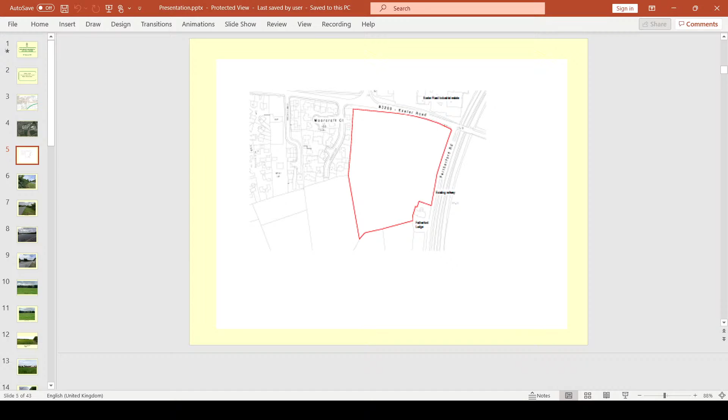For the benefit of the public and those members who were unable to attend last week's site visit, I'll just go through some photographs to give some context for the site. So, from the current verge onto Exeter Road, looking into town to the west. This is from the access points looking west into town, and that cream rendered property is the first property on the adjacent development. And then looking east up towards the railway line, the more recent Blue Bridge there, and the current change in speed limit to a 40 from a 30.

This is the site from the industrial estate entrance opposite, so that's the entrance into Exeter Road Industrial Estate. So looking back towards where the existing entrance point is, which you can just see here. And obviously you can see the adjacent development here, and the outline of Dartmoor National Park beyond.

If you're coming into Okehampton from the east, coming off the A30, this is the first view of the site you would get. That's Fatherford Lane on the left-hand side of the picture, where you can see the national speed limit signs coming up to join Exeter Road going through town. So those poles there and that height and level of hedging is the corner of the site. And you can see that there's a small section of pavement along here. There's actually a tactile paving drop here, and similarly opposite on this section of road for crossing over from Fatherford Lane.

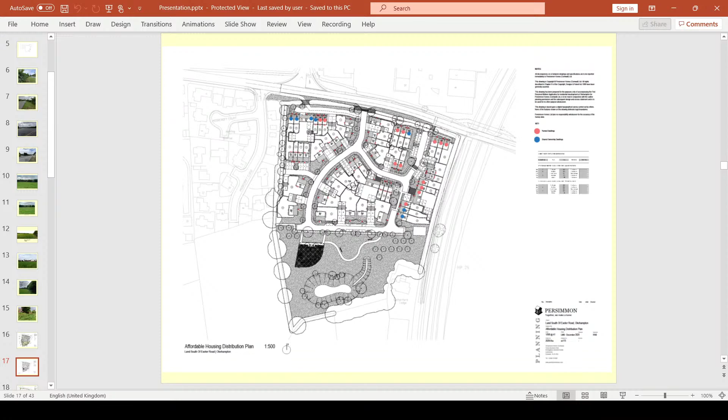The landscaping scheme and the play equipment have been altered and enhanced to address consultee and officer comments, as have the roadways, with softening of the engineering, reduction in paving and sort of hard engineering features, and a greening of the public realm. This is the play space. You can see that triangle, sort of pie shape here. That's just elaborated on there.

So it's important to note on the frontage that there is a footway to be provided from the existing footway, which currently finishes just to the east of Moorcroft Close on the edge of Exeter Road. But it is to be provided within the site itself. It comes into the site, along, and then back out near that tactile paving point that I pointed out on a previous image. So there will be continuous pedestrian access essentially along the front of the development, but not on the frontages as we would normally see it, up tight against the carriageway or the highway. It's provided within the site.

But this does still allow the properties along Exeter Road to have a frontage to face the road, allowing for a sort of more attractive built form and a stronger entry to the town. So this plan just shows, this is the entrance to the industrial estate at the moment, and this is the one to Moorcroft Close. And you'll see the pavement currently finishes roughly here.

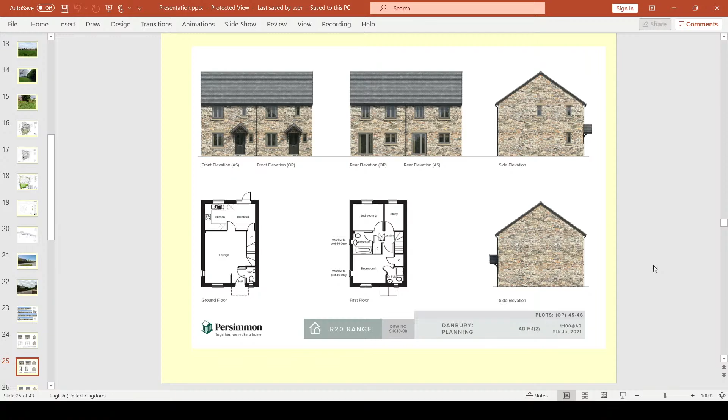This is not every single house type design because there are rather a lot, but it gives you a flavour of the different materials and the different house types that are on the table for consideration. So there are 2, 3, 4 beds predominantly. They're all relatively simple in design terms, and I don't use that as a derogatory term. They are vernacular to the area. There are not arts and crafts elements and add-ons here, there, and everywhere, because that just isn't characteristic of this particular area, particularly as you get out into the hamlets.

So just in summary then, there are currently no specialist objections outstanding on this application. All the issues that were raised with regards to the initial scheme submitted by specialists and officers have now been overcome. However, objections do remain from neighbours and both Okehampton Town Council and the Hamlets Parish Council. These are detailed within your reports for you. As always with planning applications, some of those issues have various weights and solutions.

They've all been set out in detail in my report, so I'm not going to reiterate that all now for you. As I say, it's far better detailed in the report. However, in my opinion, where objections or issues raised by members of the public or the town or parish council or officers on the previous scheme are able to have been addressed, they have been. And there was certainly a rationale provided to officers where certain things couldn't be incorporated or couldn't be addressed in a certain way. That's been rationalised to us for our understanding.

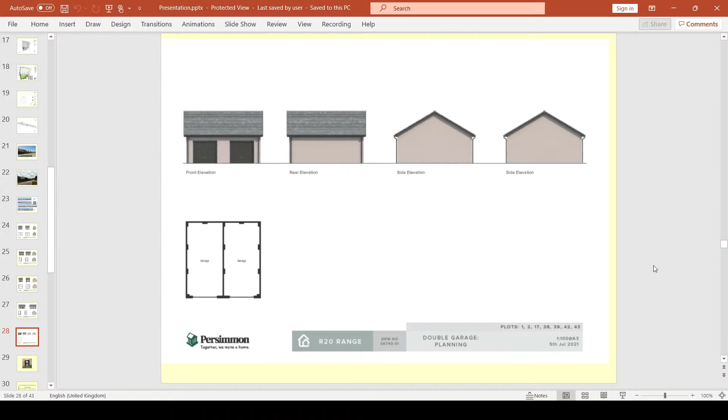So there have been a lot of changes made. For example, the units that are now adjacent to Moorcroft are much fewer in number. If I can just take you back briefly, the actual units that share a boundary with Moorcroft Close are now far fewer in number. There's one here, this is garaging, there's one here, this is a garage, and there's one here. So although you've got a terrace, it's going this way. Last time it went the other way, so you had a lot more family units and a lot more gardens going onto the same single property, whereas now there are only 3 units. The distances are more acceptable and the relationship and the orientation is more acceptable. So that was one of the changes that were made.

And similar changes were made down in this corner with regards to the relationship with Fatherford Lodge. This is the pumping station, it's wholly underground. But again, you've got an end of unit and the separation distance here. I've detailed all of those within your report, but it is far more acceptable given that this is higher than Fatherford Lodge. So all of those relationships have been better addressed. And again, that's set out in the report.

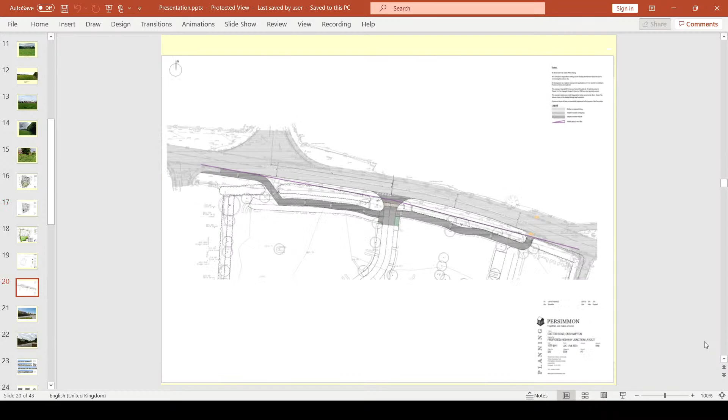Okay, members, have you got any questions? Councillor Moyes and then Councillor Mott. Yes, am I right in thinking the 3-storey houses are down on the right-hand side there? Because you said there was quite a high, or was that wrong? Sorry, can I just... The majority of the 3-storey units are within the site. That section at the bottom is Street Scene 4, which is along this southern road here, looking north.

So you can see these units here with the rooms in the roof. If I zoom back in again, sorry. Yeah, that's fine, I think. On here, you can just about see them, I think, shown in the southern roof slopes on those units there. The majority are only 2-storey. I think they're the only 3-storey or 2.5-storey. Okay, thank you.

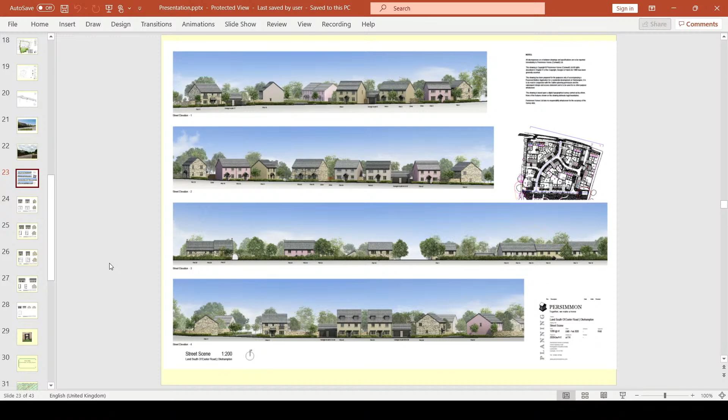Another question. On the western boundary, at the top of the plan that we've got, are they bushes or trees? And are the residents in Moor, whatever the name of the road is, quite happy with what we've proposed? So through you, Chair, are you discussing this section along here? So that's a combination of a new Devon hedge bank planted on top of it, and then the incorporation of some specimen trees through there. Our landscape officer is happy with that. I don't believe all the residents of Moorcroft Close are. Their objections to the scheme are set out within the report, and I understand we're to hear from a speaker later on. Thank you.

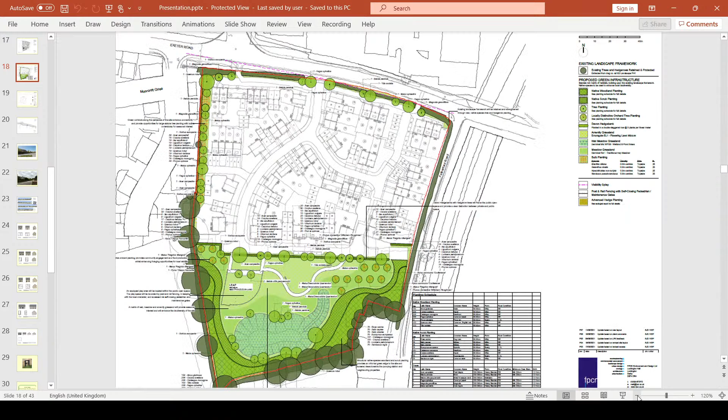Councillor Mott, then Councillor Hipsey, please. Thank you. I see in your report on page 12 where you talk about the roof tiles being plain, smooth, grey concrete. However, within our SPD 11.96, it insists on slate tiles, particularly as it is visible from the National Park. Can you explain to me why we've got that discrepancy, please?

Through you, Chair. Yeah, the SPD is guidance. It can't insist on anything. I appreciate it points towards a requirement for slate. A lot of changes to materials have been made on this site. The east of Okehampton developments in general, none of them are entirely slate, and a couple of them are entirely concrete roof tiles. In distanced views, providing they are plain concrete and not ridged or textured, from long distanced views from the moor, it is difficult to tell the difference.

There were some quite heavy concessions made with regards to the use of stone on site, and it's one of those situations where, in my view, a high proportion of the requirements have been met with regards to the SPD. It's very unusual to have every single requirement met. I'm content with the materials that have been provided. As I say, the SPD is guidance, but members can obviously take their own view on that if they wish.

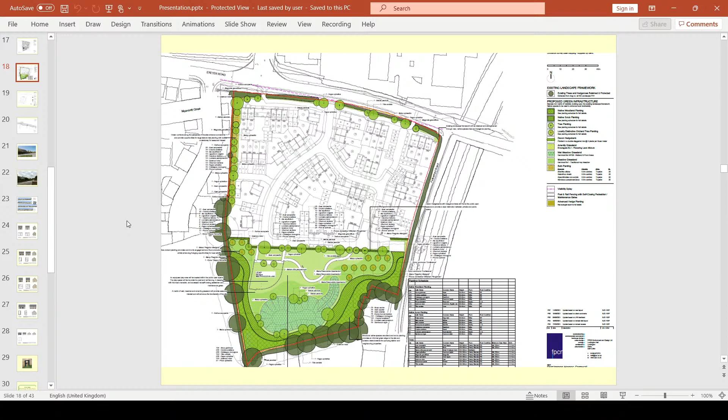Through you, Chair, yes, I am, in short. The exact distances for that are set out. I'm sorry, I'm not furnished with a paper version of the report, but the exact distances for that separation to the boundary are set out within the amenity section of the reports before you. I'm comfortable that that separation is adequate to ensure there's no undue privacy loss and overlooking.

The property there on Moorcroft is number 7, and it's side on to plot, I think it's plot 17, here. So you've got the side of this property going onto the rear of this property, which tends not to be, and isn't in this instance, primary windows. The windows that are on the first floor of plot 17, those that are bathroom windows, are conditioned to be obscurely glazed and retained as such.

And although there is an area on this boundary here at present, which you can see over the bank, there is additional planting proposed, and 2 or 3 quite substantial trees along that section. I think, sorry for the slightly strobe effect here. So it's this section here. So you can see those trees on the boundary are quite substantial.

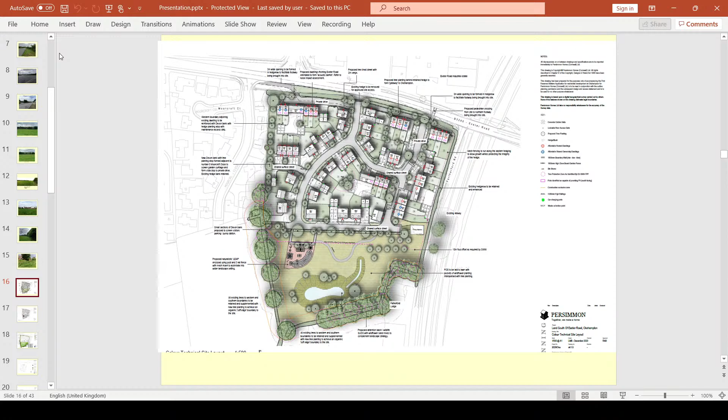Through you, Chair. It's certainly the majority. I don't think there are many that don't have on-plot. So it's not just the ones with garaging, even the ones with external parking, which, as you can see from this plan, I'm going to risk zooming in. Brace yourselves. Right, so you can see from this plan that actually the majority of units have on-plot. I think these units at the front don't. They've got a communal parking area here.

But all the others, I think with the exception of this, which I think is a flat over garage again, where you've got grouped parking here, all the other units have got on-plot parking. So as I say, it's not just those with garaging. If you own your parking space and it's next to your house, you'll have an electric vehicle charging point.

Okay, thank you. And the other thing was, obviously considering the 2030 zero carbon plans, what sort of energy is going to be used to heat these houses? Do we have that yet, or is that a question I need to ask the developer? Sorry, Chair, through you. I think it's a question for the developer. There is an energy statement which includes details of the solar panels, but in terms of what the proposal is at the moment for mains heating, it's a question best put to the developer, I'm afraid. Right. Thank you, Chairman.

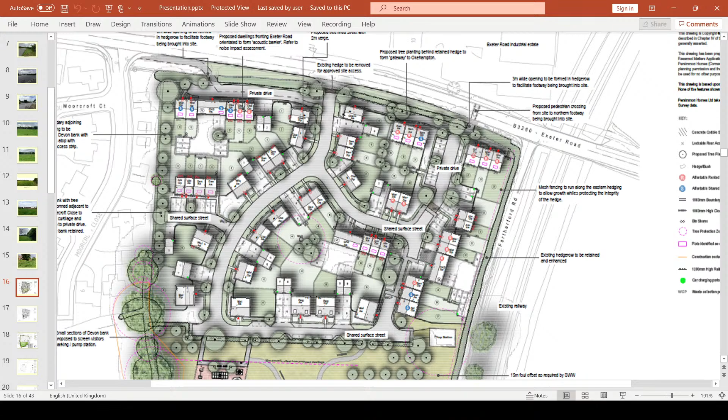Any more questions from members? No. Okay. Then I will move to registered speakers, and first up is Mr. Thomas. If you would like to step up to the podium, as they say, and grab yourself a microphone, which you will then need to put on. Sorry, which one? That is this one here. Okay. Yep, certainly, no problem. If you get yourself ready and get your microphone ready.

It's lovely. And then there's a button on the front that says talk that you can press when you're ready, and your 3 minutes will start when you do.

Thank you. Good afternoon, good morning. I'm a resident in Moorcroft Court, which is just off Moorcroft Close. So I use this road regularly, walking across it. Beautiful pictures, by the way, that you took of that. Lovely view up to Dartmoor, Greenfield site. The residents back in 2018 stipulated overwhelmingly that they didn't want Greenfield sites for any more houses other than the ones down the Crediton Road. And yet here we are again, considering a Greenfield site.

And I also believe that that may well be a protected site on the neighbourhood plan or the agreed local plan. And it would have been in the draft as well. We'll come back to that. The reason I'm standing up here now is because the planning officer mentioned that everything's been covered in this process up to now. Well, in actual fact, it hasn't. What's missing is road safety. Nobody has mentioned whatsoever how people are going to cross that road. That is a main road going in and out of Okehampton.

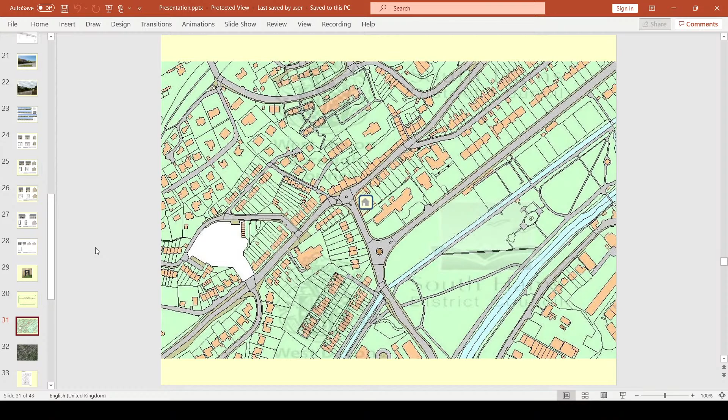It's before members at the request of Councillor Coulson, as set out in your reports, on the basis of concerns regarding parking and access. As you're aware, we've got Phil Townsend from County Highways present, members, if you've got any queries later, and similarly, given the site's prominent position within Tavistock, within the conservation area and the World Heritage Site, Graham Lawrence, our heritage specialist, is here if there are any detailed questions.

As with the previous scheme that you saw in Okehampton, this proposal before you today for consideration is also a revised scheme from that which was initially proposed, and has again sought to address the various former specialist and officer concerns and objections in order to arrive at the proposal that's before you today.

For those less familiar with the site, I'll take you through a few site photographs to give you some context for the development. So as I say, there's the application site. You can see the Drake Memorial. So this is the view across from the site towards the rear of what's now called Fitzford Lodge. So that's the fairly new Churchill development that's on the corner of Plymouth Road now. It turns that corner on Plymouth Road. So this is the site. This is Ford Street.

No, didn't think I'd manage it.

This is Ford Street, and this is the site, again, slightly close up, so you can see the Fitzford Lodge residential development along here. This is the view looking west along Ford Street, so looking back almost to the point at which the previous photograph was taken, from this sort of hedge corner here. This is looking back towards it. You can see the Roman Catholic Church and the cottages along Ford Street itself.

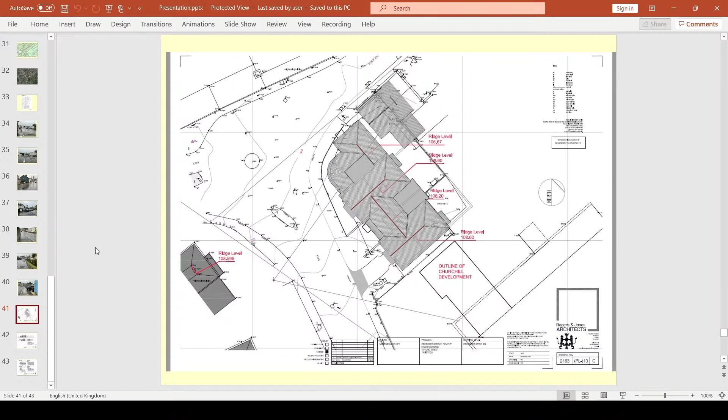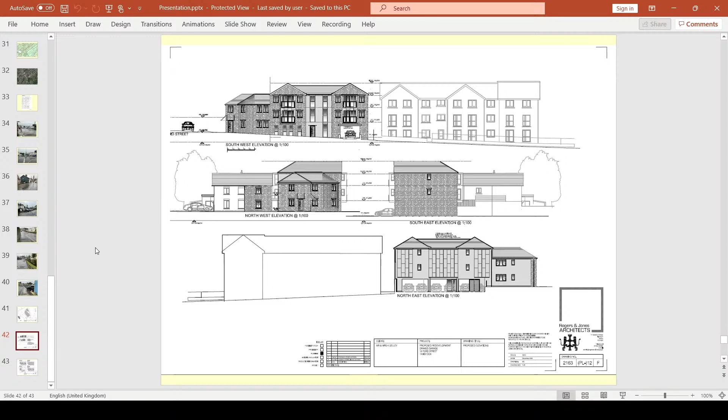That would be a better way of me having tried to demonstrate that rather than just waving my hands around. The windows are in here, not in here, in these projections. This is a blank gable, blank facade, and the windows face here, one being with a view out, the one on the next unit obscurely glazed, one with a view out, and so on. So as I say, it's quite a clever design solution to one of those issues.

So the proposal's response to the varying scales of the surrounding buildings I've talked about with regards to the active frontage, but the fact that it's still of a height that it retains a certain element of gravitas. That is a prominent point as you come into Tavistock, and a row of small units perhaps wouldn't have the bite you might want on that corner. So whilst it has these quite deep furrows within the ridges in the roof to allow that intervisibility still that I talked about with Historic England, it's still of a height that it adds a punctuation to that corner as you enter the town.

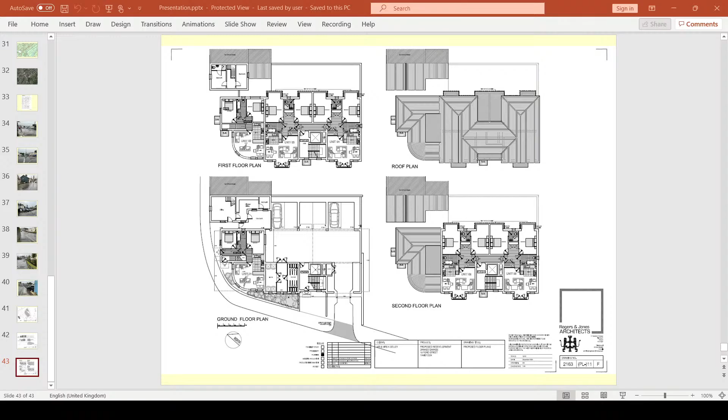Thank you. Mr. Townsend, did you wish to add anything with your highways hat on? Thank you, Chair. Ms Henderson-Smith has done such a complete job this time. There's not really an awful lot that I can actually add, but I would say that the existing access, the important thing is, as you mentioned, that the existing site is a car sales establishment, and the vehicle movement potential on and off that site is considerably in excess of what would be expected to be derived from the proposed development.